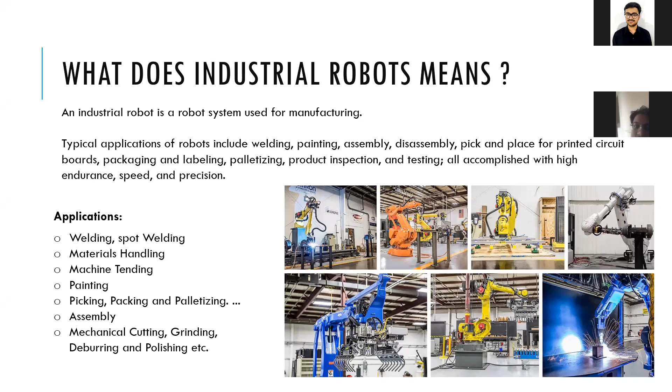So let's talk about the next part. Industrial robots are mainly divided into 5 domains, depending on the application — what kind of application we are looking for.

Let's start with a Cartesian robot. As we all know, a Cartesian robot is one of the basic robots, having three axes: X, Y, and Z. This kind of application you will find in the 3D printer that you already use in your labs — in a 3D printer we have X, Y, and Z axis. So this is a simple example of a Cartesian robot. If someone asks you for an example, this is a basic one. In this Cartesian robot, you will find three motors.

Mainly in this kind of small robot, we use stepper motors where you need high accuracy. But if you're going for payload capacity, I will discuss that later. In this Cartesian robot, you will find three types of stepper motors depending on the payload you are using. Generally in a Cartesian robot we prefer 1 kilogram of payload, but if your application requires more, you can increase the payload as per the concerned motors. So in this robot, you will find three axes — X, Y, and Z — and it will rotate and move in translation along X, Y, and Z positions.

So let's talk about the next one, that is the SCARA robot.

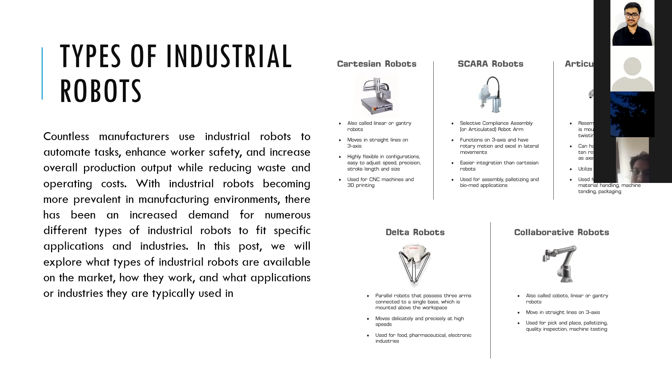So these are Cartesian robots, as I already discussed. These have 3 axes, X, Y, Z axis. This robot will only work in single translation positions. But if you want to put that thing on this wall, it's unable to. Okay. So there are some limitations in the Cartesian robot. A Cartesian robot is only used to move the pallets or your articles in just one linear position. That's why only pick and place, linear pick and place, like I told you in a 3D printer.

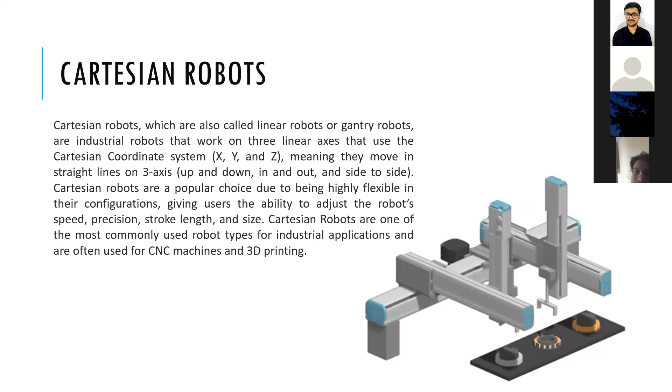Now this is a SCARA robot. These are quite delicate robots, and these robots are used to hold soft, delicate objects. These robots are mostly used in biomedical technology industries. So these also have XYZ axes, but they are quite delicate and low budget robots that can hold soft material.

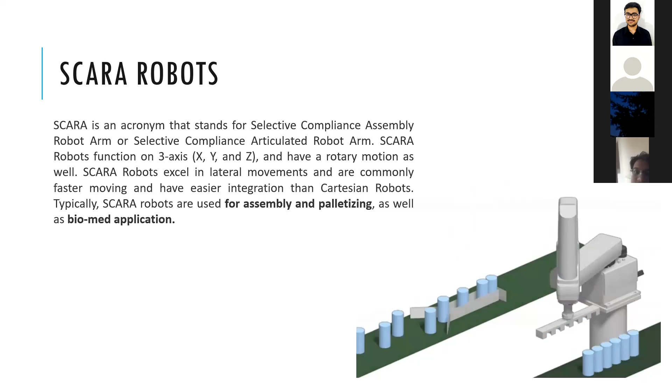Now, this is the articulated robot that I told you is one of the heavy duty robots. They have 6 degrees of freedom. See, this is one axis, this is the second axis, this is third, this one is fourth, and there's 5 and 6. There are total 6 axes. Standard is 6 axes, but some companies are introducing 7 axes also. But there is no robot with more than 7 axes as of now. In industries, mostly 6 axis robots are used.

So these robots can do assembly, arc welding, material handling, machine tending, packaging, everything they can do. The problem is that they won't, you can say, help the human being. When something happens, they will be like, I will do my work. If something comes, I will break that thing. These are heavy duty robots. They can lift more than enough weight. So this is about articulated robots.

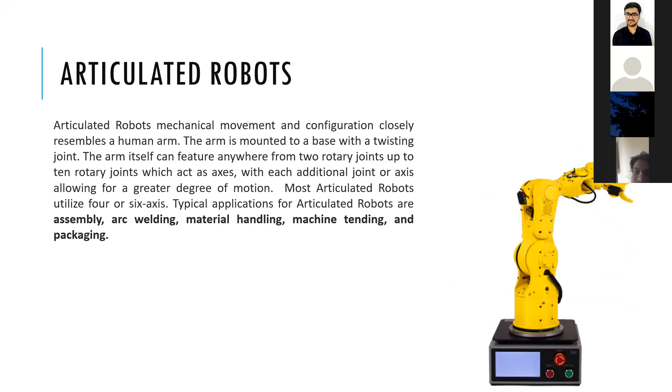And these robots use AC servo motors. These are 3-phase servo motors. As you know, servo motors are powerful motors which can hold objects at a particular angle with high accuracy. Let's come to the Delta robot.

Another name of this robot is parallel robot. These are quite trending and quite costly. That's why people are not that familiar with this robot. In India, you won't find many Delta robots in the industries. Mainly they prefer articulated robots. Articulated robots are cost effective compared to these robots, and in terms of maintenance also, articulated robots are low cost. For the last 10 years, the Indian market has been made for articulated robots. In the coming future, it will come for Delta robots also.

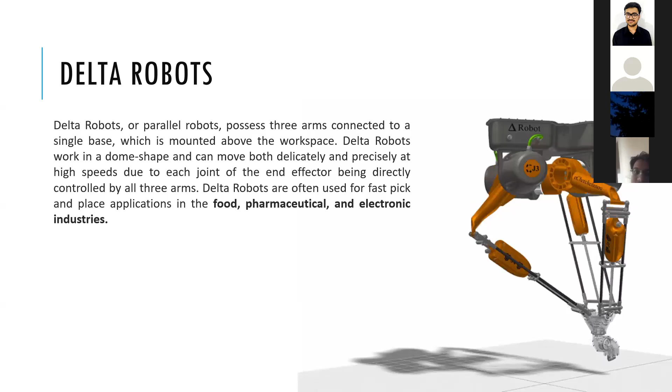So these are actually the collaborative robots that I discussed. These robots are really, you can say, human-friendly robots. This robot won't harm any person. You can teach them how to move. And when someone comes inside their area, it will stop itself, and not only stop, they will slowly reduce the speed, because in this entire body you will see there are lots of human-machine sensors incorporated in the entire robot. That's why the cost is quite huge.

In this robot, you'll find a maximum of 7 axes actually. 6 to 7 axes are there. Again, these robots are used for all purposes, because in any robot, if you find more than 3 axes, it means that robot can reach a maximum of the entire space area in the sphere. Like an articulated robot has 6 axes, that robot can reach the maximum area. Means wherever you are putting your objects, it can pick and place at that particular angle, particular flooring, wherever you want. And cobots are quite safe in terms of safety.

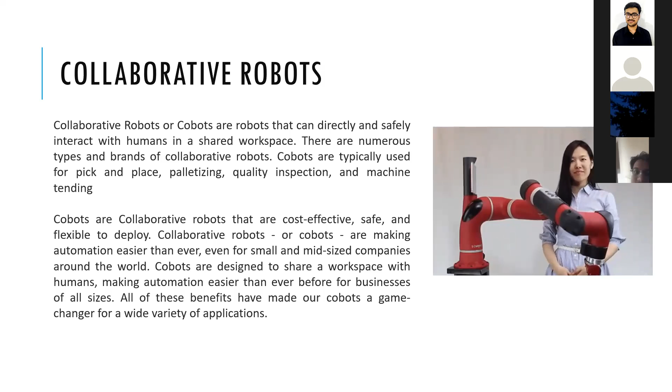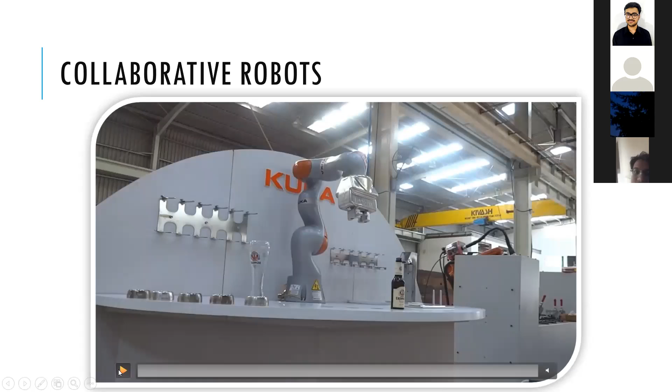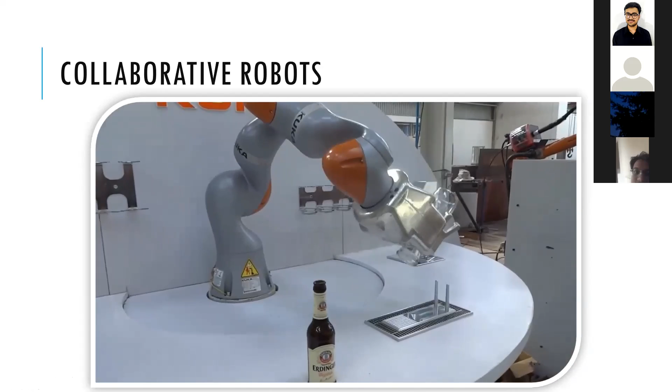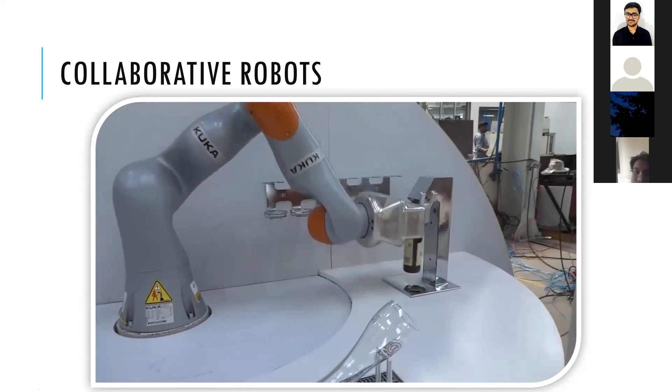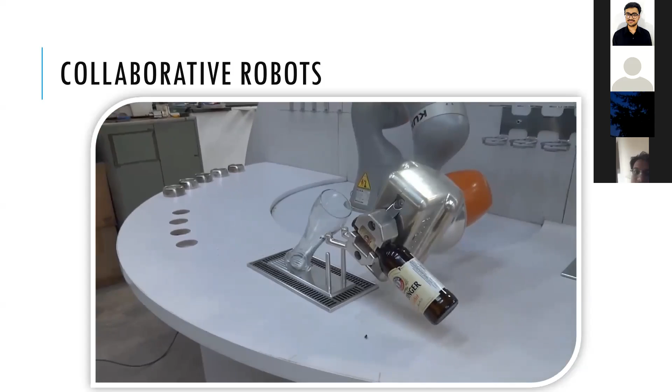These robots are really designed for delicate things. They have multiple sensors. They know how to hold which object. Means if you say this is a glass, this is a bottle, they will give that much pressure. So in the entire body, you will find lots of sensors, like pressure sensors, force sensors, obstacle avoidance sensors. Multiple sensors are equipped in this entire robot. As you know, the company KUKA is one of the leading robot manufacturers in the world. The company is from Germany.

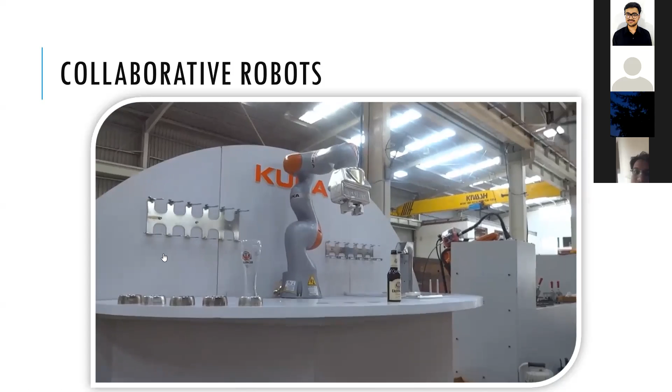There are some features of cobots which I already discussed. See, these are some features: power and force limitations. Each joint has some force sensors, as I told you, so that can prevent accidental harm to human beings.

And also, there's a hand guiding option. If you want to do some delicate application, you can just hold the robot and move that robot. It will learn the motion, how you are moving that robot. This is called hand guiding technique. These cobots are really intelligent, you can say. Whatever path you tell them to follow, they will follow that particular path.

And one more thing, they have some speed and separation monitoring features also. As I already discussed, if something comes in between their workspace, it will automatically reduce the speed, and they can even stop. Again, when the object moves away, it can resume from that particular position. These are quite smart robots, you can say.

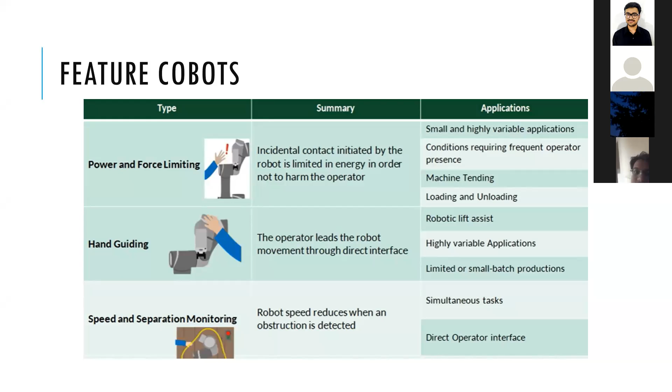So in terms of safety concerns, there is safe velocity monitoring. This robot, as I discussed, will monitor the velocities, safe workspace and safeguard zones. So safe collision detection, due to the incorporation of lots of sensors. As I told you, pressure sensors are there, lots of proximity sensors are there, and even dust sensors are there.

There are lots of sensors in it. The safe force and monitoring. So this is actually quite an interesting point. You can say avoidance of pinching or crushing. If something happens, suppose you put something in front of the robot, it will hit that object. That's sure, because without hitting it, it cannot detect.

But it will also sense what kind of material it is, so that it can give that much force. Like I have shown you that video where the robot is holding the glass. So first they will press that glass, or you can say metal glass, whatever you are holding. They will automatically sense the pressure, how much they have to put, because glass has its own weight, right? So in terms of weight, it will apply the force.

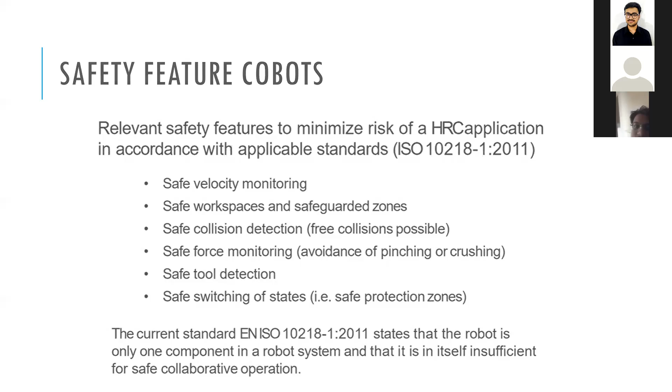As you know, industrial development is going on. So in our industrial trend in the 21st century, we are equipping the robots. As you know, robots are not a new thing. We have been using robots for so many decades in multiple ways. But in today's generation, we are equipping robots with the latest technology like IoT, big data, machine learning, AI, cloud, and all. So that's why our companies' R&D sectors are working on the advancement of robots.

So that's why in this trend, the companies are using high accuracy and high-tech techniques to make their robots intelligent enough to give more accuracy and be more powerful in all aspects. They are making these things powerful.

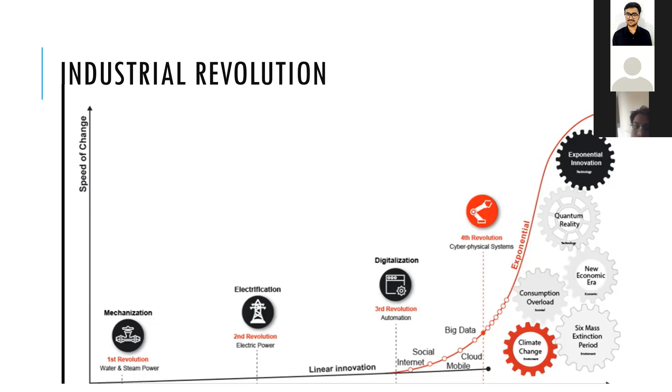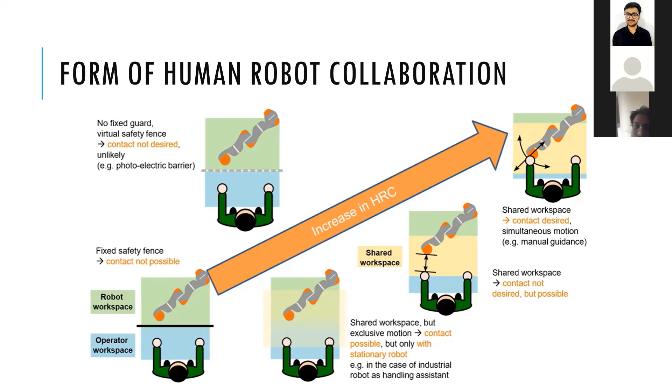But when you are holding the robot and physically carrying it to particular positions, it's like holding a pen and writing or drawing something with your own hand. It's like if you hold a pen directly versus holding that pen with a stick — holding it directly with your hand is more accurate. It's something like that, the robot is in your hand, so that gives you more accuracy in all directions.

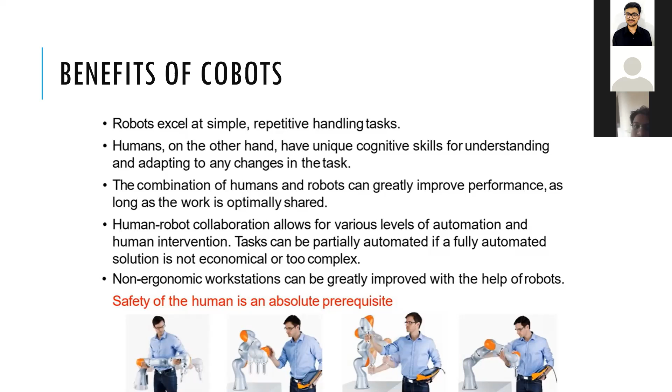I'll show you the entire design of the robot. See, this is the entire robot design, what that person is holding. These are multiple sensors. If you look at the entire body, there are lots of sensors and also some motors.

In this robot there are 7 axes: axis 1, 2, 3, 4, 5, 6, and 7. You will find a total of 7 axes in this robot, meaning the entire robot is divided into 7 parts. That is called 7 degrees of freedom. Degree of freedom mainly refers to the independent movement of each joint. Like in our hand, we have 3 joints: shoulder, elbow, and wrist. Similarly, this robot has 7 joints, so that it can reach almost the entire space — not maximum, but wherever you want to reach, the robot can reach it.

So let's come again to the back slides. Now, industries are using the open source platform to program the robots, as you know, robots are a machine.

The main part of the industrial robot is the motors, because without an appropriate motor, the robot is not going to work up to the mark. So initially, industries decide how much payload they have to develop, and accordingly they choose the particular motors. Most robots use servo motors, while a few SCARA and Cartesian robots use stepper motors, where you need high accuracy, low speed and low payload. But where you need more payload, you have to use servo motors.

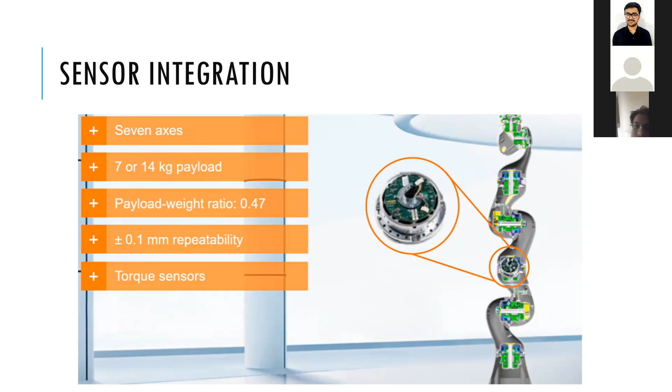If some human beings are doing some pick and place, some packaging, this is now completely done by robots. Like in the automobile industries, cars and trucks are manufactured using huge multiple assembly lines with multiple robots. Some robots are putting the engine, some are holding the door, some are doing welding, some are doing screwdriving. In a single assembly line, they are putting more than 20-30 robots, doing multiple tasks as per whatever they have been programmed. This is a huge application.

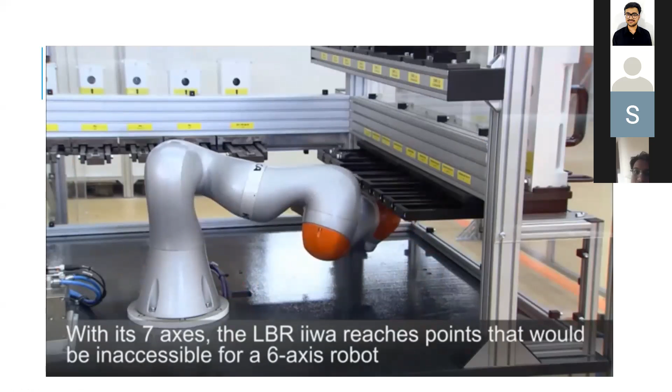See, these are some applications of cobots in the industries. See, this is reach actually - this robot can reach anywhere, like we can reach. It's a 7 degree of freedom robot, so there is no limitation in reaching a place for these robots.

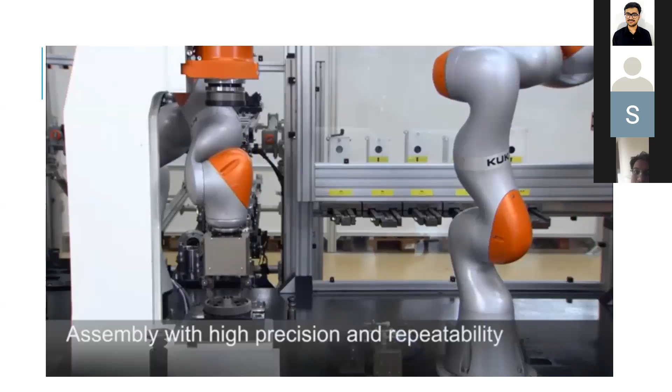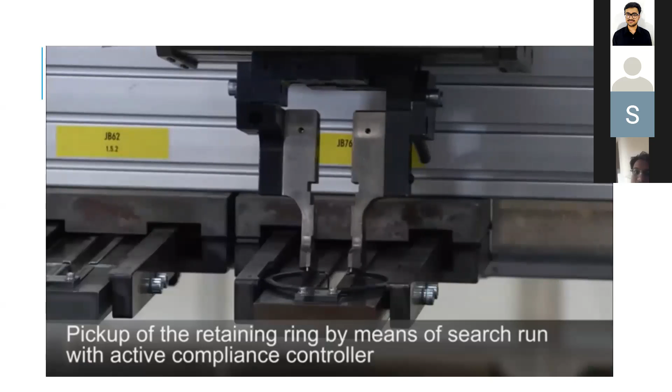Cobots are designed in such a way that they can synchronize with other robots without any programming. Some research is going on where these robots will be internally connected with the IoT platform, so there is no need for any particular programs to do that.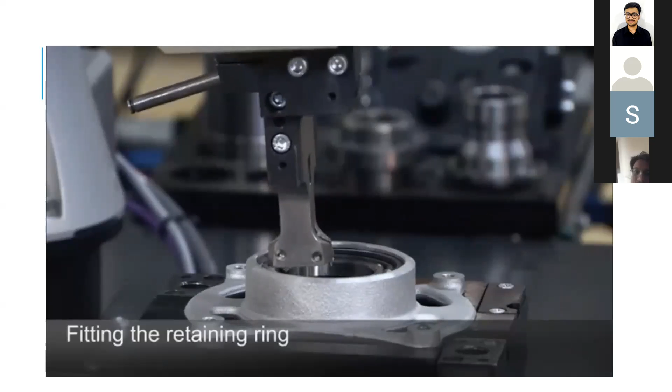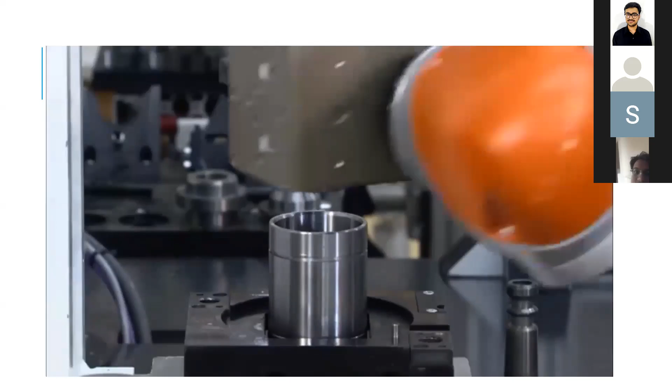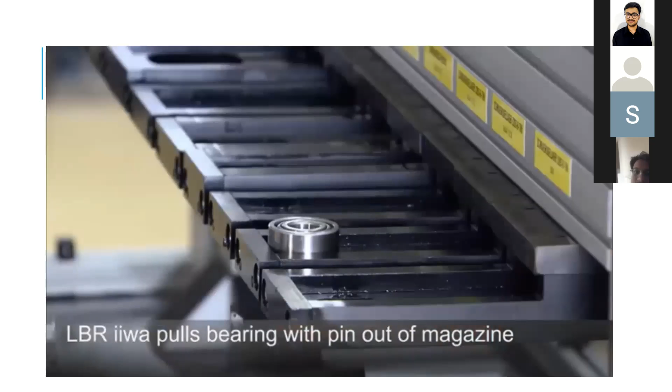This is a goodness of this robot. They can try to fit the object. If something gets stuck, they will keep on trying, asking why it's stuck, like a human being. If we are putting something in a hole and it's not going inside, we wish to keep trying to find out why. Similarly, the cobots are that much smart. They keep applying some extra pressure so that the material should go inside.

Okay, then I will discuss something more about our TEXMiN and all. So first, ask your questions if you have some. Afterwards, I will discuss a different topic on that.

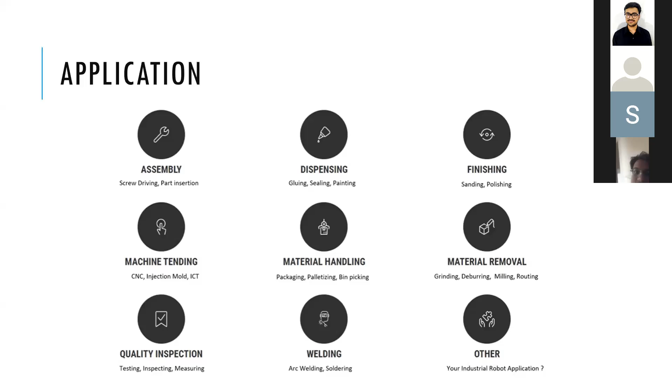So you can directly mail me whatever design or plans you have. Then we will discuss, and it's not like you need to give a perfect solution, but we'll also suggest changes to make. We will also provide the entire lab setup, entire research lab, whatever you are looking for. And we have huge support from NITI Aayog, MSME, and the TEXMiN Foundation, sponsored by the Science and Technology Department, DST.

So is there any question from your side? If someone has any questions, you can raise. Okay. Okay, but what kind of tools exactly are you talking about?